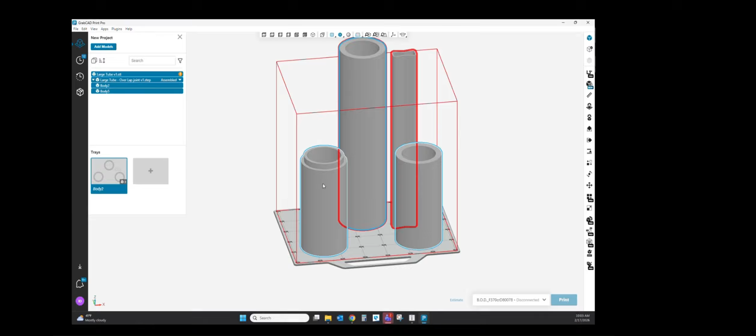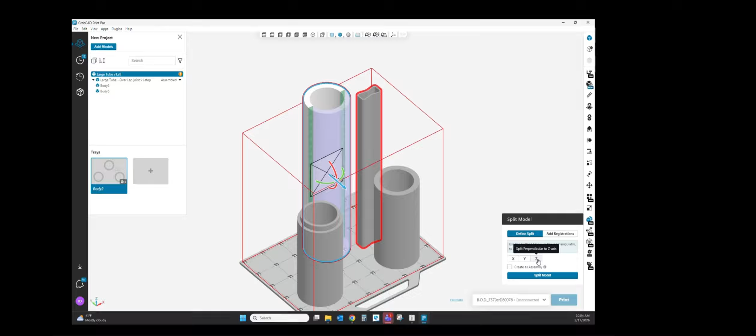And then I have another large part here, and I just wanted to go through the sectioning tool that's in GrabCAD Print, in Print Pro. So I can go in here and select my part, and I can say split model, and it will ask me in which direction I want to split the part. And for this instance, I'm going to say Z, and then you can just use the cursor to get to the correct height. Maybe you had a feature in here you're trying to avoid, or you just want it to split right at the top of the platen or whatever. That doesn't really matter all that much.

But the next tab here is add registrations. So if it had to be clocked or indexed a certain direction, or it could only fit a certain way, you can add these registrations however you see fit, just so it goes in the right direction. And then these have adjustments, so you can make them smaller, taller, shorter, or add more clearance depending on what type of technology you want to use to bond them. So a little less clearance if you're using solvent, a little more clearance if you're using epoxy. But to apply those, you just click, apply them wherever you want them. If you do 3 of them, you can only put it on one way pretty much, and then hit split model.

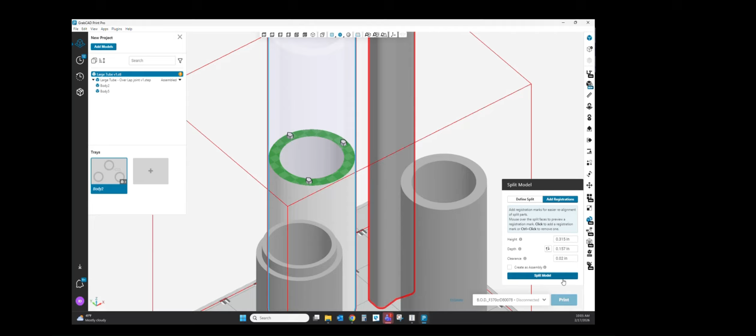And then you have your 2 parts ready to be printed. And then once you're done, you can go ahead and bond that together however you want.

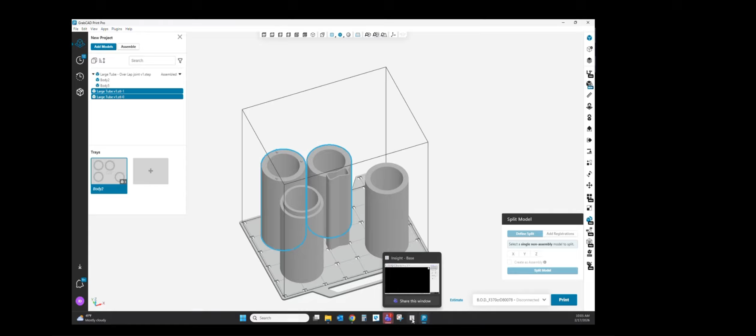So that is GrabCAD Print, just doing the generic sectioning in here. I wanted to open up Insight. We can do another type of section in here. All right. So I want to open this part so you guys can see the error I get when I open.

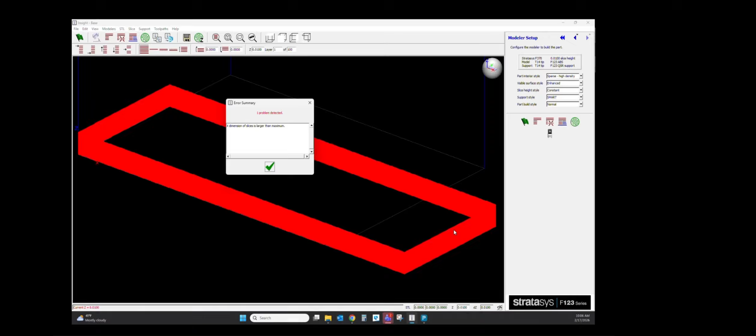So if you have a part that's too big for the platen when you open Insight, it will give you an error and say it's too big in whichever direction that it's too long. In this instance, it's X. And in Insight, we have the ability to come in and section this part however we see fit. There's a couple different tools here. One is section with profile.

You'll notice that the Insight kind of looks a little bit old school. That's because it was designed before Windows XP came out. So just bear with me on that. But it is very powerful.

So go ahead and start your section. You just go to Slice, Section with Profile, and then you'll get this toolbar at the right-hand side. And it's going to tell you what it's going to save the left and right side as when you do this cut. You have a couple different drawing styles you can use here, but I usually just do snap to grid if I'm making a generic dovetail.

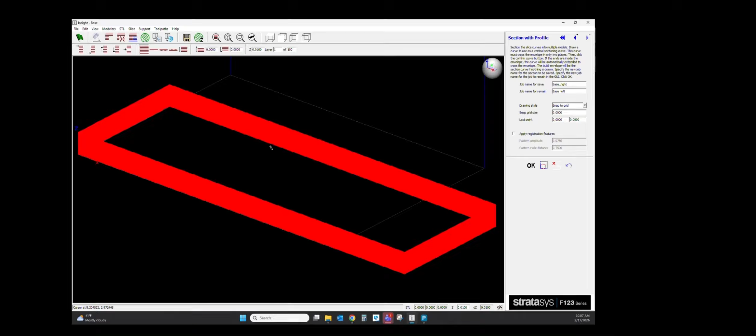So something that's long and flat, you don't necessarily want to have it be a straight edge cut because there's really nothing for the bonding process to hold on to. If you're using epoxy, that'll be a weak joint. And if you're hot air welding, it could lead to a little bit of potato chipping and stuff like that. So I'll just show you what I would recommend for larger flat parts.

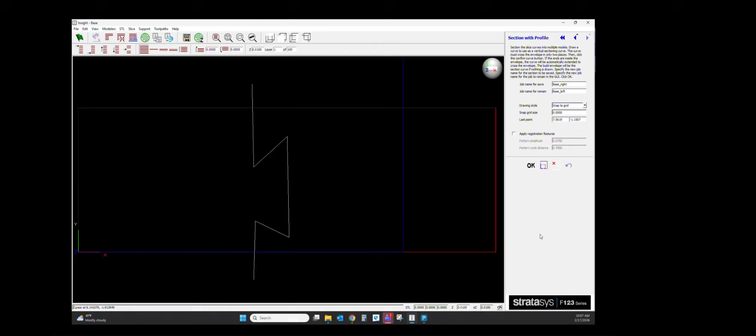I usually just do a dovetail, just create a few points. This is probably going to look a little bit hokey, but bear with me. And then that would be our section cut across the part itself. And then once you hit OK, it will save these parts to that base directory where the initial job came from. So now you can see that we have a section part that would be ready to be hot air welded or solvent bonded or epoxy bonded.

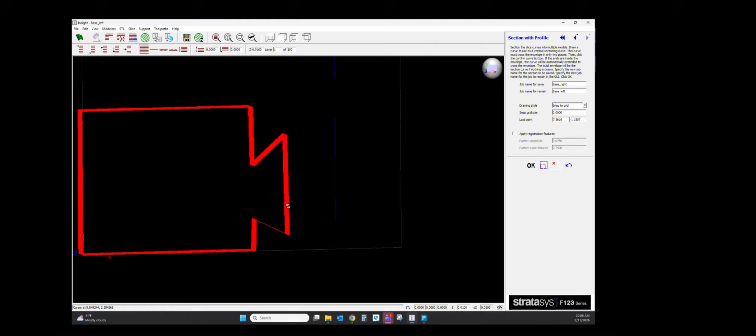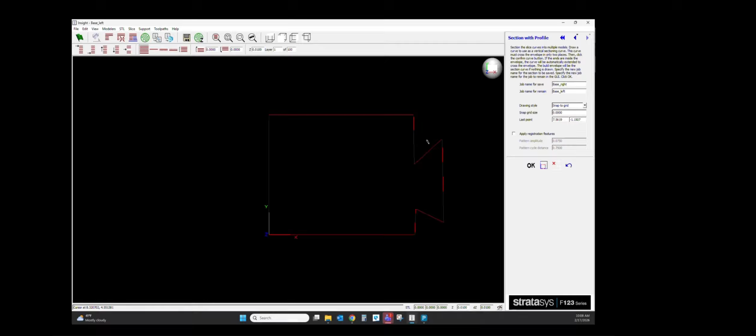The only problem that I have personally with doing it in Insight is that there is no clearance on the seam to seam. So when you try to fit this together, it's going to end up fitting a little bit tight. So at that point, you'd have to do a little bit of sanding, especially in the inside corners. You'd have to do some sanding there on the outside corners to get everything to fit. But it will be a nice, clean seam when you're done sanding and everything.

I'm going to reopen this file again. There's also another section tool, which is nice for bulky parts. I'm going to stop sharing for just a second here. So this seam actually gets created. I had to go check out all of our parts in the lab so I could get a good example, but this is the section with registration tabs in Insight.

So this is the default type of registration that it makes. It's just kind of a sawtooth. And it fits together really, really nice, as you can see here. And this would be good for solvent bonding or epoxy bonding, just because it's a nice mating surface and it increases that surface on there. This is a pretty nice way to do it, and I'll show you how to do that inside here quick.

Make sure my parts don't fall off my desk.

Oh, here I got a couple questions. Can you draw a radius in Insight to make a dovetail, or just straight line segments? You can, but it is based off of points. I'll show you here. If you do that section with profile, you have to create the points yourself. So not super intuitive. Like I said, it might look a little hokey when you're done.

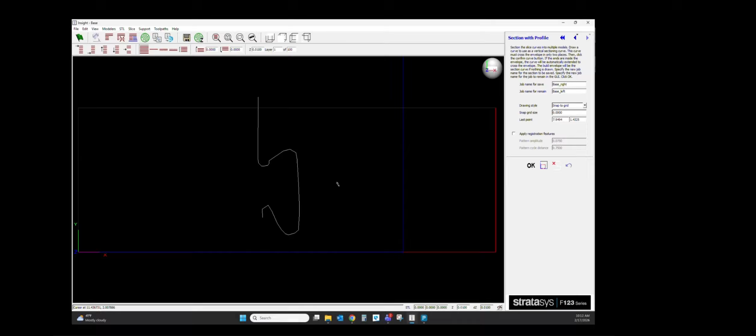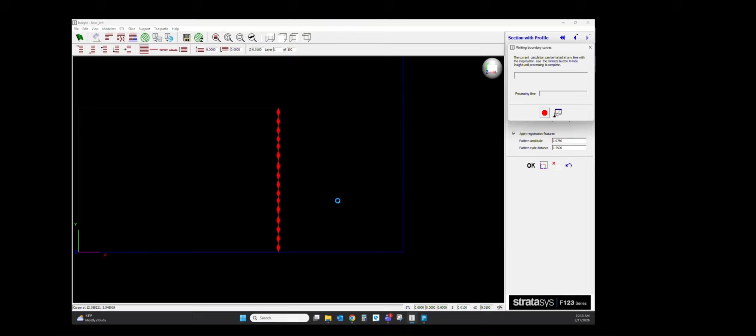Okay, let's get back to what I was trying to do. Close, reopen that file again. Boom. All right. And then here is the section with profile. We're going to apply registration features, and you can just click anywhere and it generates a straight line across the part. Okay. And now you can kind of see here those generic sawtooth patterns within that part.

So I have a link to a YouTube video here that I want to bring up, and this shows the hot air welding process. Hot air welding is a little bit difficult. You have to practice a little bit. You're using the filament off of the spool. So if you're building out of ABS, you're going to grab a piece of filament off of your ABS spool. Nylon, same thing, you use nylon.

The hot air gun that we prefer to use is made by Leister. It is a little bit expensive, and it has multiple tips with different diameters for the type of welding you're going to do. We used, I want to say, an 1/8 inch orifice, and that one seems to work pretty much the best. Like I said, they are a little bit expensive, but it is a pretty useful tool.

You can use this for bonding. You can also use it if you had a sanding scratch on one of your surfaces and you wanted to remove some blemishes; you can actually reheat that blemish and kind of do a flame polish with that.

All right, and then here's my link to the video on Stratasys Academy. Their YouTube page is pretty good. They've got a lot of good stuff on here. I found this just by looking around, and they do a good job of showing how to do the hot air welding step by step. So I'll just fire that up here.

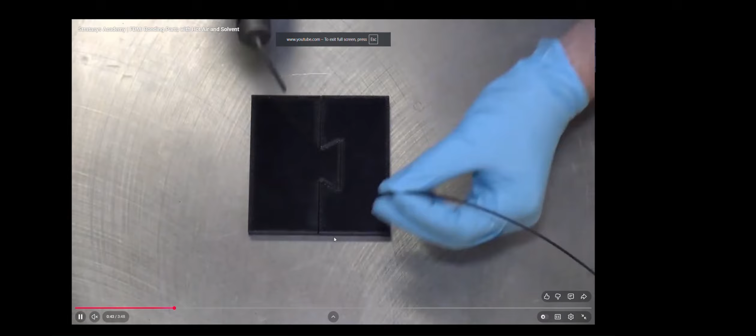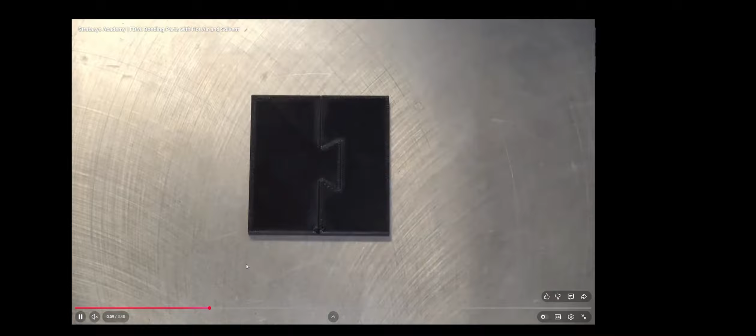So here you can see they've just done a generic dovetail. It's got a little bit of clearance on there. And in this instance, I think they were just doing black ABS, so it's a little bit easier to weld this than nylon or Ultem. So basically you want to start on a flat table, a piece of granite or something like that, and you'll want to tack weld the outsides. That way you can make sure it's going to stay nice and level.

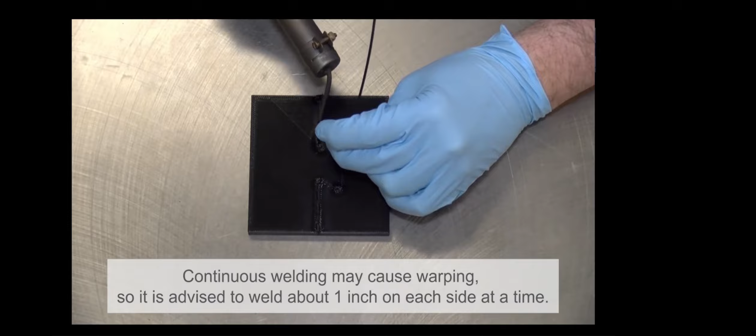And then you just work your way in, tack welding small places at a time, keeping certain that the part is flat. And then you'll start running your beads after you get everything fixed in place. You don't want to do large welds at a time. If you can, minimize it to like 1 inch at a time; that can help minimize some of the warping that will occur with any type of welding process, whether it be plastic or metal.

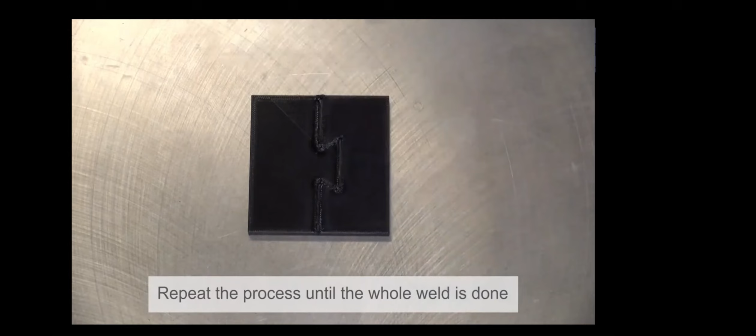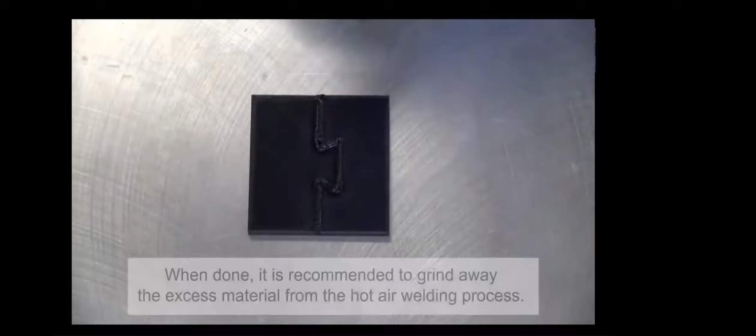So here you can see what he's trying to do is heat up the material in front of the filament and the filament at the same time while applying downward pressure. That way it gets good penetration into the material so it can adhere a little bit further down within the part. When you do that, though, it does create a little bit of a void. So you have to come back and fill it again after you've done the initial weld to bond the part.

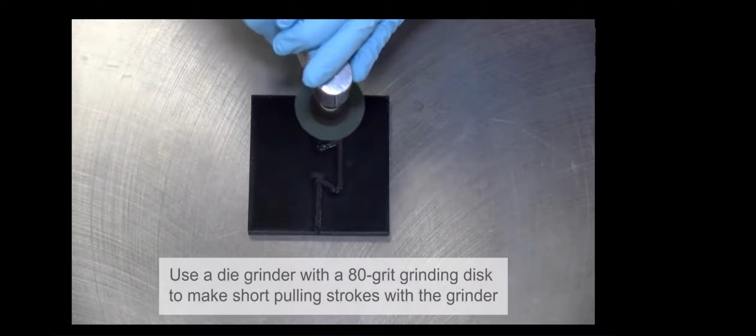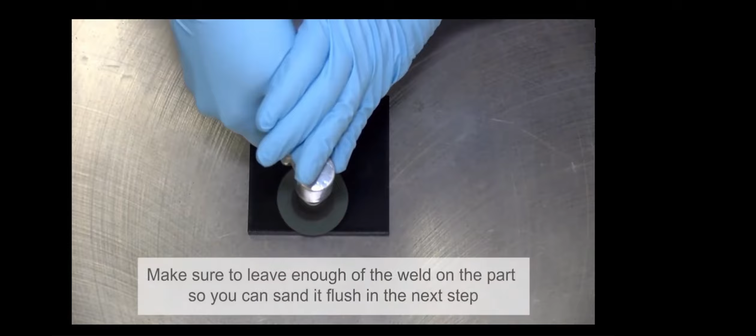Once you're done, he's just using a Roloc disc sander to knock down the high parts of the weld. And it seems like it might be easy at first until you dig the edge of the Roloc sander into the part and you get a big groove, and then you got to go back and fill that with some more weld. It takes a little bit of practice, but once you get it, it's really a nice way to get parts bonded. And then you just take your DA sander and sand everything flat, and then that's what you should be left with. It's just a nice, clean looking part.

So the solvent bonding step here, this is what you would do on the back side of a weld. If you were doing the hot air welding with ABS, you would put this on here on the back side just to kind of close that all off. And like I said, with the solvent bonding, you just want to make sure that you've got a lot of surface area and a little bit of a registration feature like that dovetail. Overlap joints are also really good for solvent. If you can use an overlap joint that you can design in your SolidWorks or Creo or whatever you have, that's going to probably be the best for the solvent.

Have I tried using a pen to weld parts together? I've used it to patch holes. I haven't tried it to bond parts yet. I don't know how well that would work, just because you can't get the heat applied deep down into the part to get that to adhere together. I don't know. Yeah, if you do try it, I'd like to hear some feedback on it and see if it does work okay. I can imagine it would be good to fix blemishes if you had blemishes that you wanted to dig out. You could try to use that and then sand it flat.

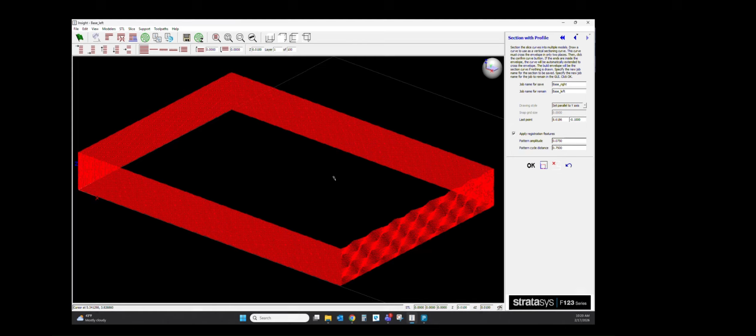Oh, can you show the tool for sectioning one more time? Absolutely. Do you guys want me to run through both GrabCAD and Insight again? I can do both. Okay, section profile.

So that section with profile in Insight, you just go to your slice and then you do section with profile. And then you snap to grid, you're just going to draw just a little spline across.

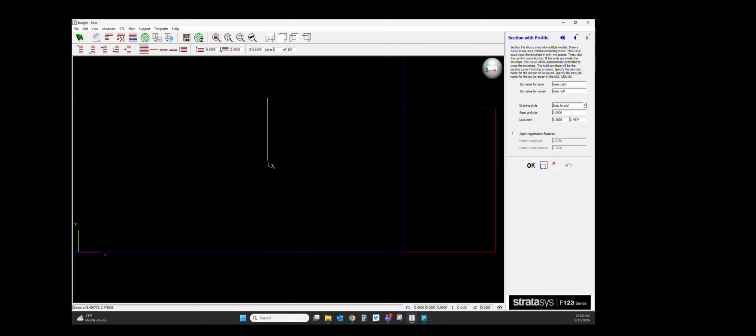You know, you'd think I'd get better at making these dovetails, but I'm just struggling. Look at that. Terrible. My kids in here to do this, they'd do a better job.

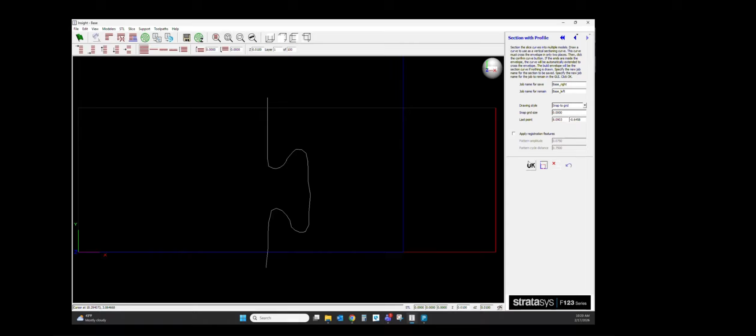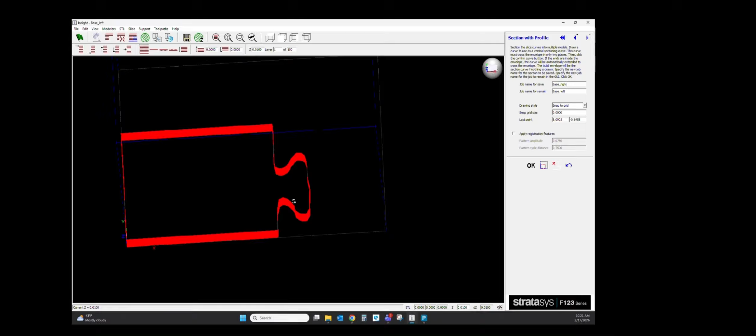All right, there we go. And then once you get it drawn, then you hit OK, then that will save the right and the left section. You can name these whatever you want before you start that process as well. And then it will open one of the sides first. The section with profile.

And then what brands, types of solvent adhesive do you use for ABS? Good question. I'm going to stop sharing my screen here, and then I'm going to show you this handy dandy stuff. So this is Plastruct. You can get this at most hardware stores. I know you can get it online. McMaster-Carr has it as well. Fastenal, things like that.

And then there's a brush in here. I mean, it's okay, but it takes a long time if you have a big part to bond it. It just looks like a nail polish brush. So it takes a while to get that to go across a part that's as big as an F-series platen. So I actually like to get these little needle bottles and fill these up with the solvent, just pour it in there. And then you can just squirt that right into the seam, and it gets a little bit further in there as well.

So that is a couple of the brands there. So there's this Plastruct, and then there was one that was called Weldon. I believe Plastruct does work with PLA as well. I haven't experimented with bonding PLA parts before, but I think it would. It might be a little aggressive for PLA though. Oh, here. Yeah, should work. Oh, Phil just put up a link for the plastic weld or the Plastruct, and you can get it a lot of other places as well.